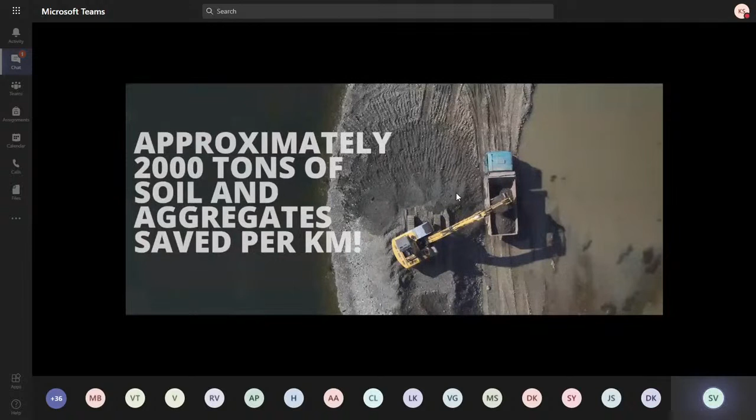Sir, it is not audible, sir. Sir?

Yes sir, so just a small video about where we're heading as a company. If you see the impact on environment over so many years, it is huge because of use of aggregate and other natural resources needed for construction of roads. If you look at the last 5 years, almost 40,000 kilometers of highways were built, and 60,000 kilometers are planned for the next 5 years, and this is only the highways. If you look at link roads, state highways, village connectivity roads, PMGSY, and various other organizations building roads, we're talking about huge numbers of kilometers. So it's a huge loss in terms of aggregates, and we're losing hills and a lot of other resources. Our goal is to try and reduce this as much as possible using environment-friendly technologies. We came across this technology in Germany 4 years back, and that's how we pursued it. We're intending to save anywhere between 80 to 90% of aggregates.

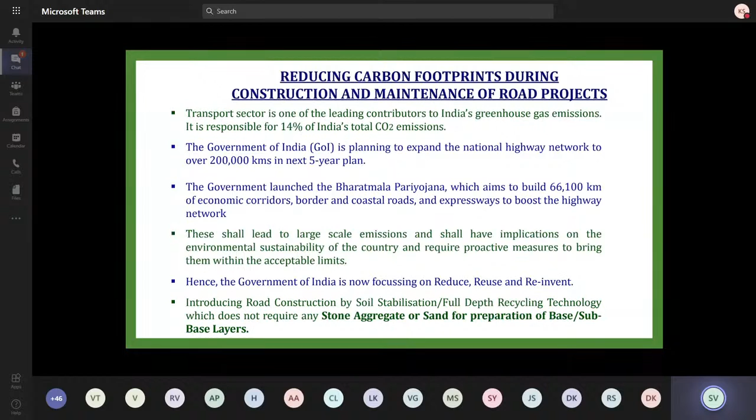The Ministry of Road Transport has previously come out with environment-friendly initiatives. In 2015 they came out with a circular stating that if projects are finding difficulty in implementation because of lack of aggregates, they can ask the government to go for new technologies. A few contractors have asked the government to change this policy. Especially states like Kerala have banned mining, so they have to get aggregates from outside, typically Karnataka or Tamil Nadu, leading to huge cost overruns of projects. Also Northeast has a huge problem with aggregate, as do Uttar Pradesh, Bihar, and Andaman. So all these states have problems or are in the process of banning mining. This is where we feel new technologies will play a very important role.

So I just want to give a brief on StabilRoad additive. Basically, stabilization has been there for many years, it's not new. It's been used in different parts of the world for maybe 30 years. In the last 7-8 years, we've also slowly tried it in India. They've done it with lime, used cement, and used fly ash to improve the subgrade or increase the CBR on a different scale.

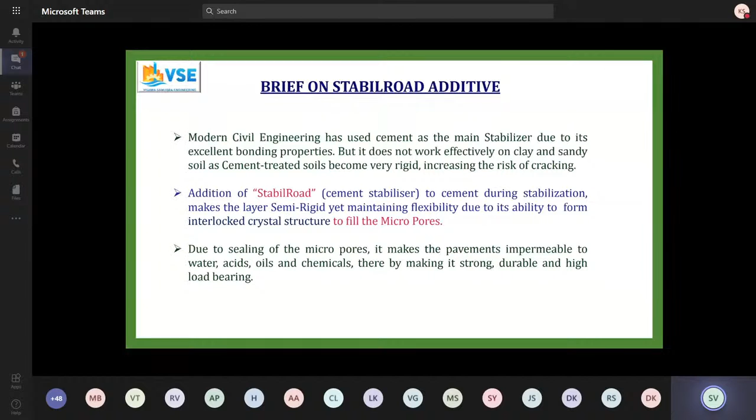So a StabilRoad is a cement additive which makes the layer semi-rigid yet maintains flexibility due to its ability to form an interlocked crystal structure that fills whatever pores are there in between. Due to the sealing of the micropores, it makes the pavement impermeable to water, acids, and chemicals, thereby making it very strong, durable, and high load bearing. It retains excellent dimensional stability even in damp and humid conditions, increases the elastic modulus of the pavement, eliminates the risk of shrinkage cracks, thereby enhancing flexural strength and significantly increasing the life of the pavement.

StabilRoad is manufactured by B&K Industries and is 100% natural. It uses 100% natural minerals with no synthetic chemicals. It's been tested in various organizations in India, especially the Indian Institute of Toxicology in Lucknow, which has tested it and given their report. StabilRoad has been used in different parts of the world over the last 20 years, and we brought it to India about 4 years ago. We have the exclusive rights for this product in India and in other countries around India.

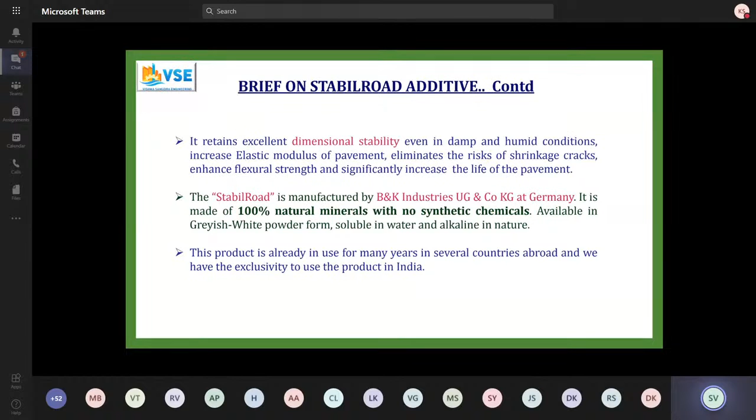One major advantage is very fast laying technology. Typically, the conventional method or a cement road takes anywhere between 2 to 4 weeks to complete 1 lane kilometer, especially when it comes to cement. Using our technology, if everything is planned and logistics are good, we can do almost 1 lane kilometer per day of stabilization. After 3 days, we can go for a layer of BT on top. So pretty much in 3 to 4 days, we are done with 1 lane kilometer. That's how fast we can do it.

And once we stabilize it, if there's an emergency, we can allow traffic within 6 to 7 hours, but ideally we would like anywhere between 12 to 15 hours. So there's no issue with allowing traffic, whether it's a rural road or a road with a lot of traffic in the city. We can allow traffic within 6 to 7 hours.

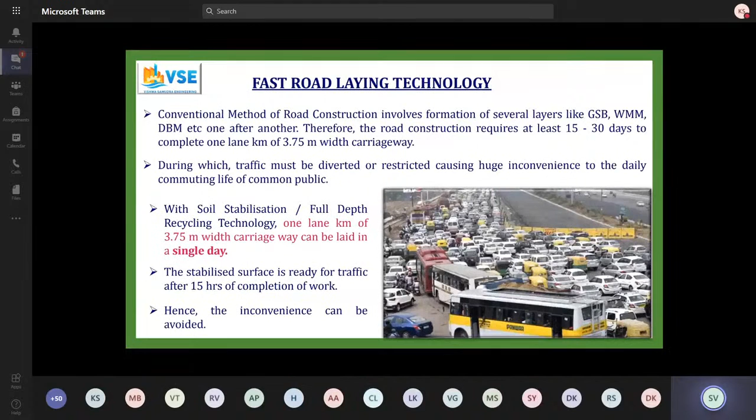StabilRoad has been accredited by the Indian Roads Congress, and like I said, we've been using it for more than 3 years.

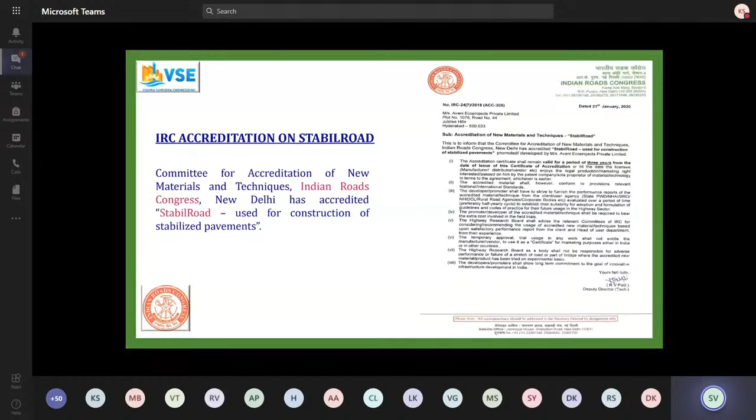Soil stabilization and full depth recycling. Basically, soil stabilization is a process where binders or additives are added to the existing soil to change its engineering properties. We've done different projects in India, including greenfield projects, where we use soil stabilization. Full depth recycling is for existing pavement, where we rehabilitate it by just mixing cement and additive. So we're not removing or wasting any portion of the road. Usually we scarify and remove 30%, or in some cases use 30% of the asphalt for recycling of the bitumen. So here we're not removing anything - we're using the same surface and stabilizing it.

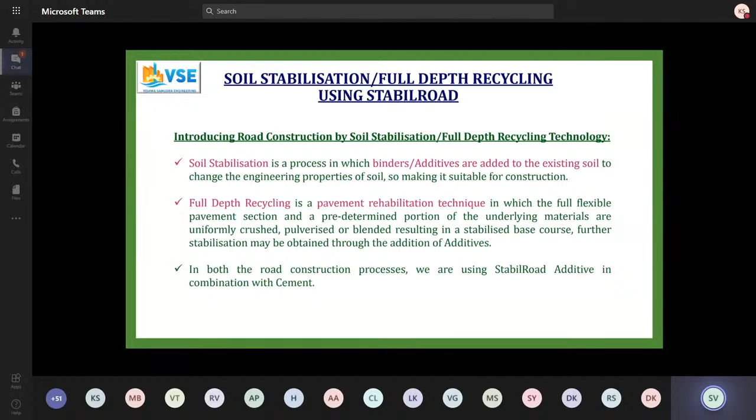So typically we are following IRC SP 89 Part 2 2018, which basically shows the guidelines for design of stabilized pavement. There are about 3 main factors in SP 89. One is the stabilized base layer should have a minimum compressive strength of 4.5 to 7 MPa.

The second is the durability of stabilized base should be tested by wetting and drying for 12 cycles. Maximum permissible weight loss after this procedure is 14%. Residual strength of the specimen after this test shall not be less than 80% of 28 days UCS.

A commercial chemical stabilizer has to be tested for toxicity and leaching by CSIR, IITR Lucknow, which we have already done. If the product passes these tests with reputed institutes like CRRI, IITs, NITs, Indian Institute of Toxicology, then it can be used.

In our case, from the beginning, CRRI has been with us. They've tested our roads from the day we started our technology. It's been 3 years. We just finished one road, actually 2 roads, after 3 years. CRRI tested it actually 2 weeks ago. So the entire process of 3 years has been done with regards to testing for strength and durability as well as FWD. I'll share those reports over the progress of this presentation.

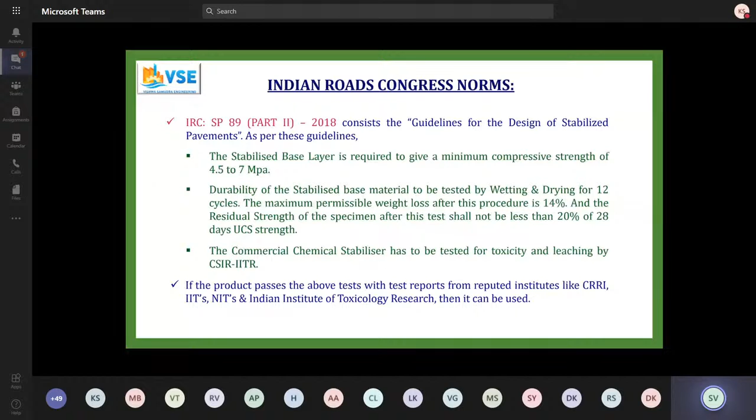So some of the benefits of stabilized pavement are: native soil can be converted to base course, reduction of excavation, disposal and transportation, reduction in crust thickness, faster construction, increased lifespan and low maintenance cost.

If you see the life cycle cost, it will be definitely much lower than the conventional roads, and the cost saving in the long run. That's what I meant for life cycle.

If you see also, sir, the load bearing - in general conventional roads, the load is on one point, whereas in the case of stabilized road, the load is being spread across the road. So that helps in giving us a better life cycle.

The highlights again - one more important thing is a reduction in thickness of pavement. Because our layer is so strong, the modulus is pretty high. Because of that, using IITPAVE, we can bring down the thickness of DBM and BC to a large extent.

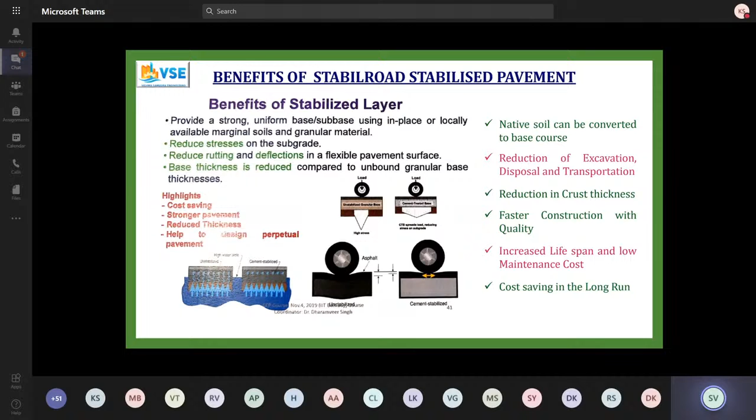This slide basically tells you a typical construction procedure using our design. As you see, the entire thing is mechanized, starting from spreading of cement to spreading of additive to recycling to compaction to grading. So the entire thing is totally mechanized, giving us excellent quality, and there is no chance of trying to save on the parameters of cement and all this.

After we finish rolling, typically we need about 3 days of curing. Traffic can be allowed within 12 hours. Curing goes on when the traffic is there. On the 4th day, we can go for a layer of prime coat and then go for a BC on top.

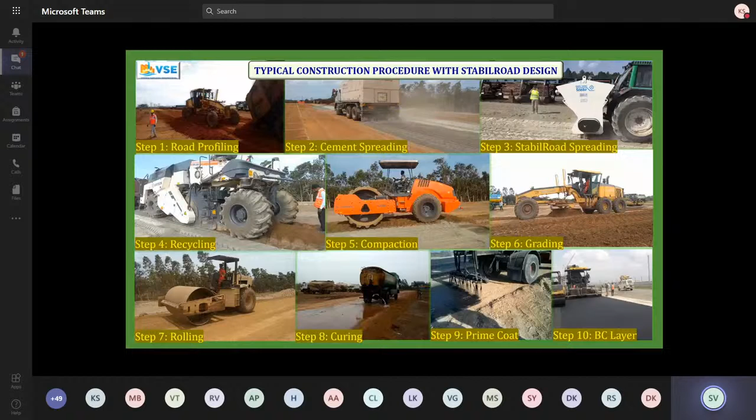I'm going to share a small animated video just to explain how the machine works, and then I'll show you another video about how the technology is, a brief video. Here we're spreading cement. There's an additive spreader which is not here, but then water is being pumped into the machine.

This is just a small animation. Now let's show the actual video.

We have done it in two roads. The first part shows you Greenfield Road, which we have done in a port where the volume was very, very high. We measured and we're talking about more than 200 MSA of traffic. The other part of the video shows you a road we have constructed in Hyderabad city, in the center of the city, on an existing BT road. So please go through the video.

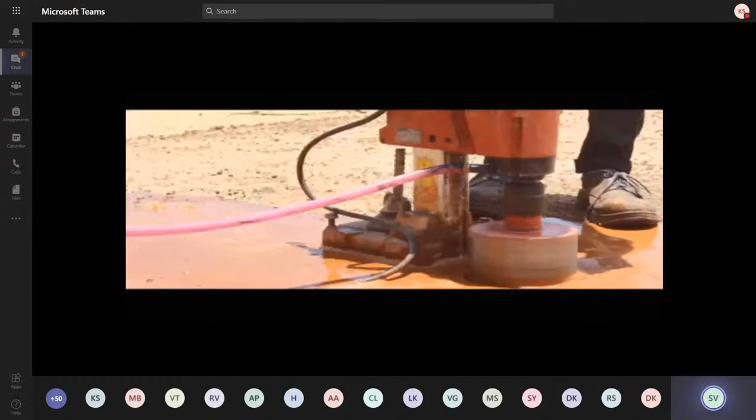We've taken a core after 28 days. Here we went up to a depth of 40 centimeters. We haven't used one single stone of aggregate.

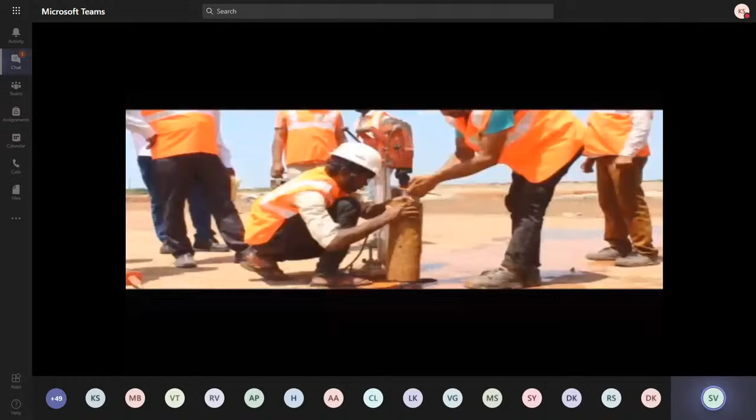The second part is the road in Hyderabad. If you see, this is existing BT. It's just spreading cement on top of the road. We haven't scarified anything.

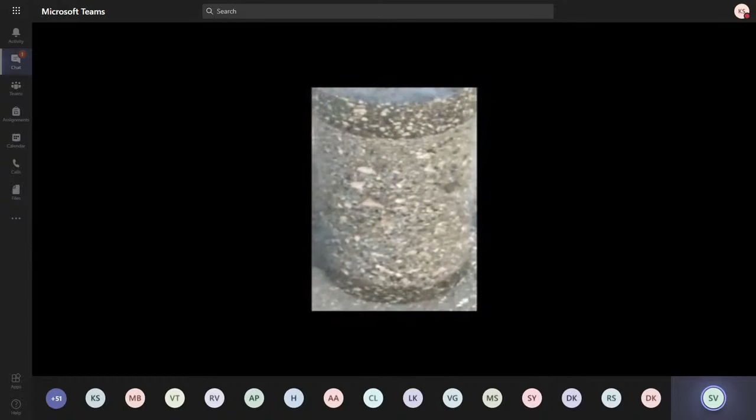Yes, sir. So the projects that we have executed so far total around 200 lane kilometers in different parts of the country: AP, Telangana, Kerala, Punjab, Bihar, Andaman. We are jointly working for construction of 400 kilometers of rural roads in Andhra Pradesh. This is funded by Asian Infrastructure Investment Bank, AIIB.

We have started work and completed close to 100 kilometers so far in different districts of Krishna, Kadapa, Anantapur and Kurnool. We are presently executing 80 kilometers of road in Andaman for NHIDCL, around 37 kilometers of road in Bihar for Ministry of Road Transport as a national highway.

15 kilometers for UPEIDA. They're constructing two expressways, Purvanchal and I forget the other name, but we're doing about 15 kilometers for the service road. Once it's been tested and proven, we intend to use this for the main expressway as well. We're also executing the rehabilitation of Hyderabad International Airport run by GMR, doing about 2.4 lakh square meters using our technology.

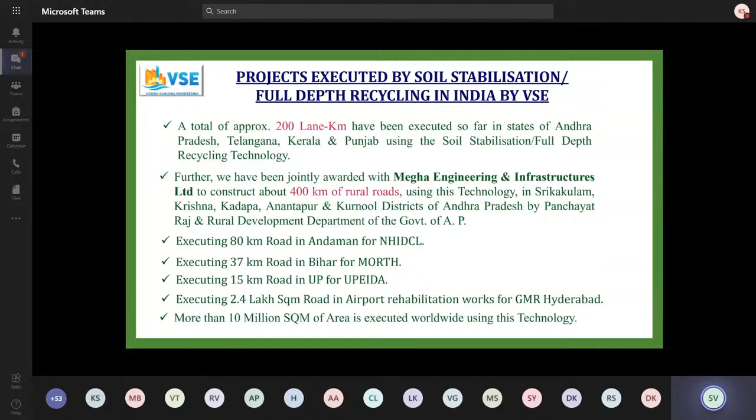Some highlights I quickly want to point out with regards to CRRI and IIT. Apart from CRRI, we also tied up with IIT Roorkee and IIT Chennai. IIT Chennai has already done a report, and we're in touch with Dr. Veeraragavan as well.

And IIT Roorkee with Professor Ransinchung, they've been doing work with us for the last 2 years. Coming back to CRRI, according to SP 89, the UCS after 28 days should be 4.5 to 7. In the lab at CRRI, they got a strength of around 5.88 on average, but actual on-site we have achieved 10.2. We've observed this in almost all the roads we've done so far, where the test result is much higher than what we're achieving in the lab.

The durability test - all cores have passed the durability test for the last 2 years. Now, for the third year, we've sent the cores to CRRI just yesterday, so they will be testing for durability for the third year as well. Most of you know about durability - it's 12 cycles, 48 hours each. I think 42 hours in an oven, then remove it, put 5 hours in water, then brush it and repeat. This has to be done 12 times, and after you finish, they check for the weight loss.

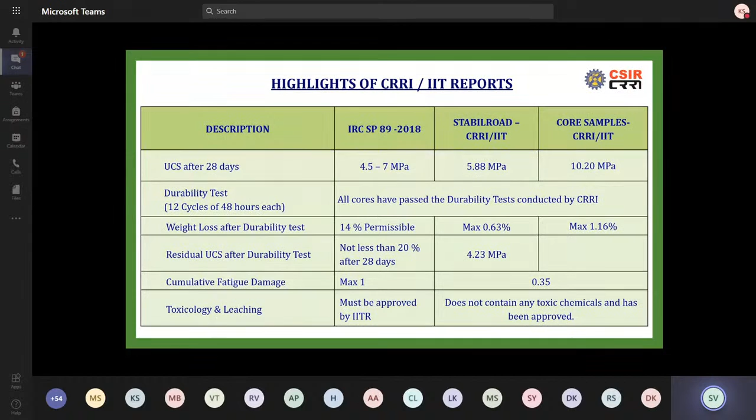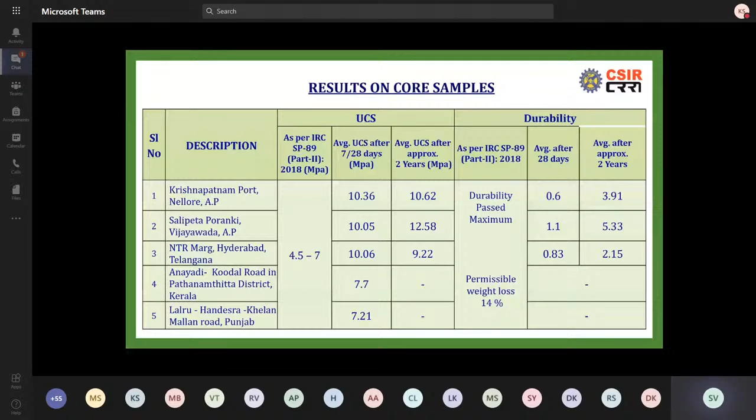These are the various roads CRRI has tested. For the first three, the average UCS after 28 days was 10.3. The next year, and the durability also is the same, around 3%, maybe 4%. These are other roads where we have achieved the UCS after 28 days - we are all well above the norm of 4.5 MPa.

This is the leaching and toxicity test I just mentioned, from the Indian Institute of Toxicology. They tested it for toxicity in various areas, and 0% immobilization was observed after 48 hours. So Stabilroad cement stabilizer is considered safe. Apart from that, IIT Chennai has also tested for leaching and toxicity, and the report is also there.

So I'll quickly run through all our projects with pictures. This is the work we're executing at the airport in Hyderabad, GMR. There are actually two runways, each 4 kilometers long. The width of one runway is 45 meters, the other is 60 meters, and the taxiways as well. Stabilization we have used close to 2.5 lakh square meters.

We're still in the process of doing it - we've finished around 80,000. The balance is on the main runway, which will be starting by December 1st. The cement we used is around 25 kgs per square meter, and Stabilroad was around 1.2 kgs. This is because there was already a lot of aggregate at the bottom, so the surface was relatively strong, so we used less amount of Stabilroad.

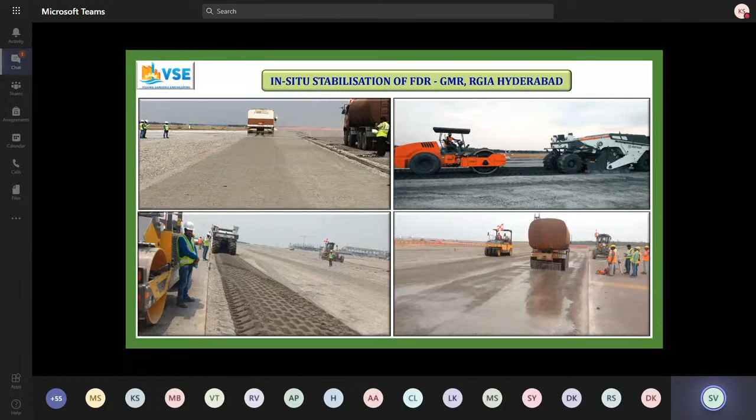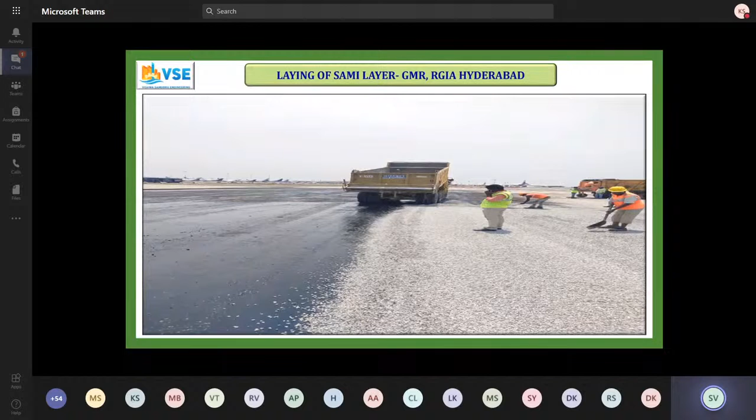These are the pictures of in-situ stabilization - spreading cement and then recycling. Then we went for a SAMI layer, using the chip spreader, which is totally automated. It comes through that chip spreader layer. First we put PMB 40, then laid the chips on top of it, and then rolled it. The consultant for GMR asked us to do two layers of SAMI, so we did two layers, one on top of each other, before going for SDAC and DAC.

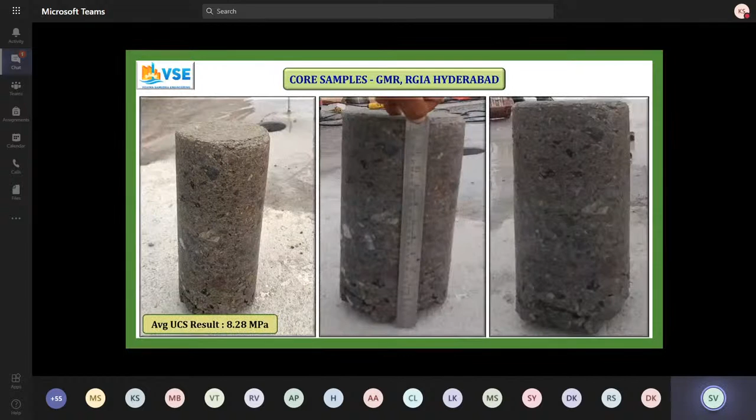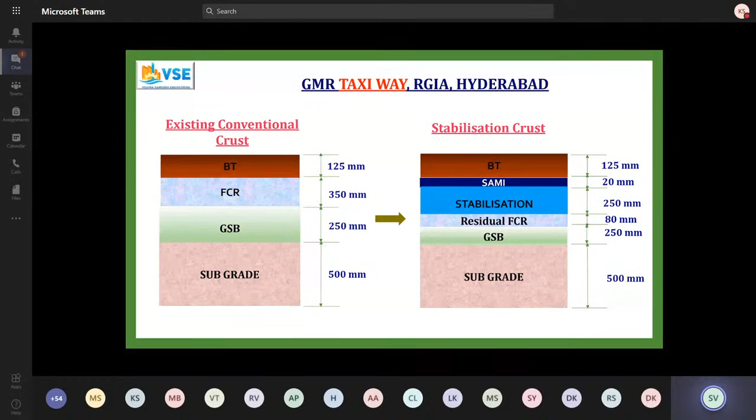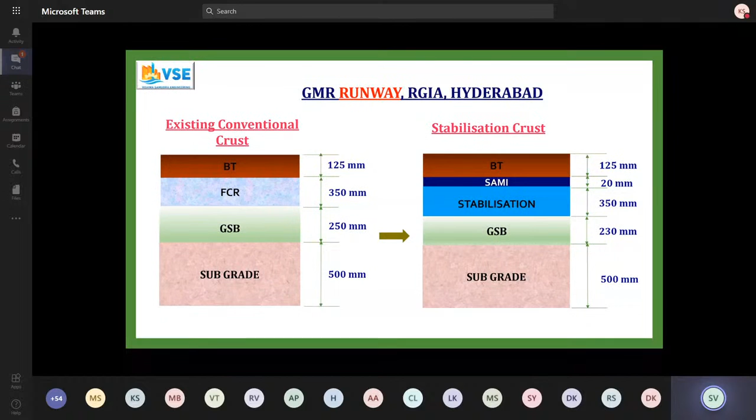So here we saved about 75% in aggregates.

The works were executed under MORTH, NHAI and NHIDCL. We did a road in Bihar, in Sitamarhi, the Jayanagar stretch. Here they had a lot of issues with aggregates, they were not able to get aggregates to the site. So that's when the Ministry of Road Transport asked us to find a solution, and we went and did that.

Its total stretch is 37 kilometers. The first phase is 20, and we finished around 13 kilometers so far. We used around 40 kgs of cement and 1.4 kgs of Stabilroad here, and went up to a depth of 300 mm or 30 centimeters.

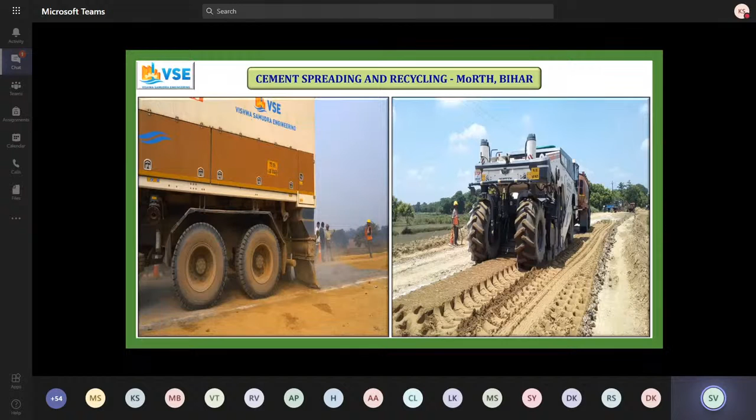If you see the soils, there's an existing road, and of course the soils are very sandy and very different, typical soils. So we have stabilized here up to a depth of 300 mm. This is how it looks after stabilization.

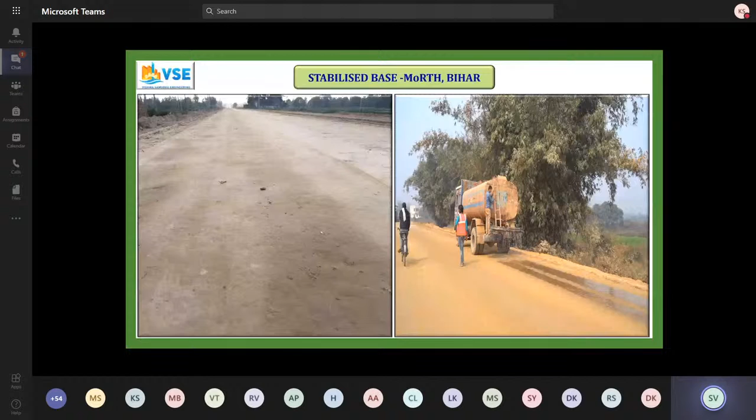Here we used a geosynthetic as a SAMI layer. Since we're using cement, there are bound to be certain superficial cracks on top, so this is to arrest the cracks coming into the BT layer. We have gone for the SAMI synthetic paving fabric, and on top of that we spread the BT.

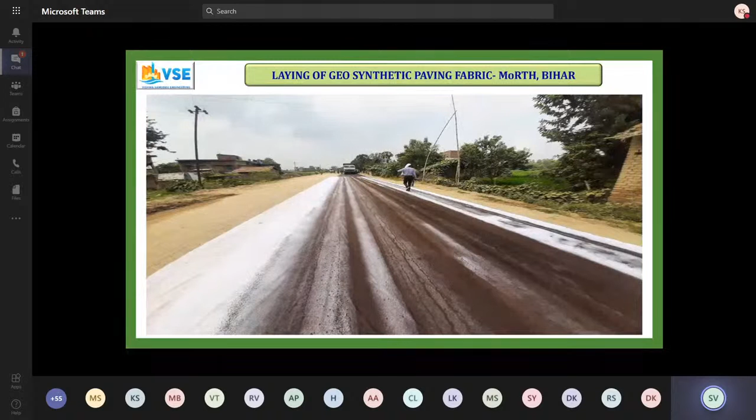Here we haven't used DBM because the traffic is less than 20 MSA. If you see here, GSB, we've gone for 300 mm of stabilization followed by SAMI. Oh, I'm sorry, I think we did use DBM - it's a national highway, I think it was 40 MSA. So we used a DBM of 50 and then BC of 40.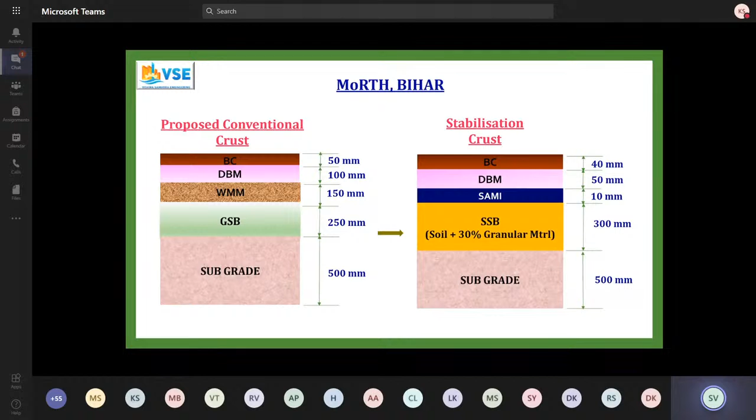Here again we used, if you see, a 78% reduction, but the aggregate usage you see is mainly for BC and DBM. The actual stabilization part, there's hardly any aggregates that we used. These are the cores in Bihar.

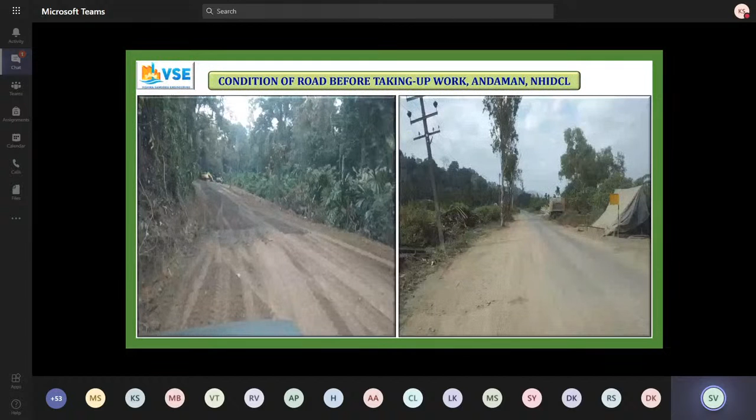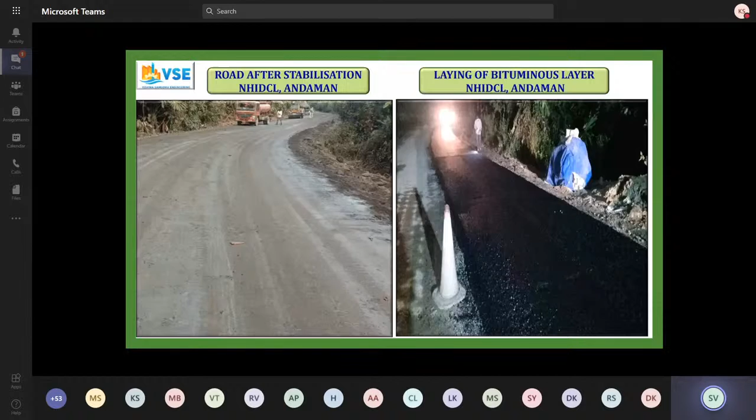Using this technology, we have saved almost 350 crores for the government because of shipping of aggregates. So this is the road before taking up the work, and we're spreading cement and the additive, and this is after stabilization. They went for a chip seal and then a layer of BC on top. This is the chip seal being rolled on top of it, and this is the finished wearing course.

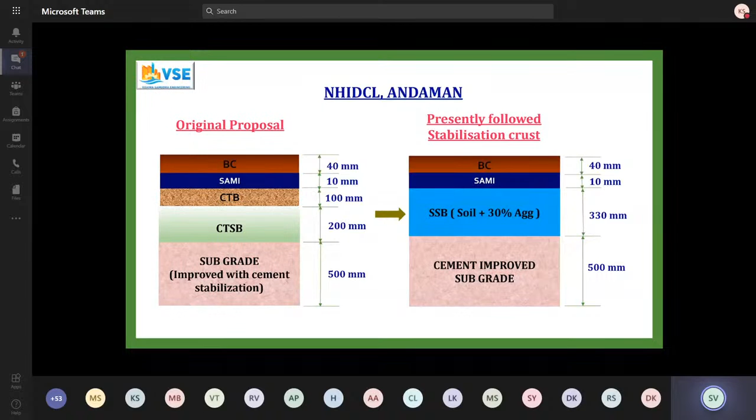Again, we've gone up to a depth of 330 mm or 33 centimeters, followed by SAMI and BC. Here, if you see, we've saved almost 90% in aggregates. The traffic was 20 MSA, and the UCS we achieved was around 8.9 MPa after 28 days.

The existing road had some aggregates, so that's why you see aggregates here. Otherwise, per se, we haven't added any aggregate - whatever existing soil was there, we just churned it.

This is a road for PWD. You just saw the video - this is in the state of Telangana. This is the road you just saw, after 3 years. It's the same, this road was actually getting damaged before, that's why they asked us to do it - there's a lake here, and so it was getting damaged. But now it's been 3 years and not a single rupee has been spent on maintenance.

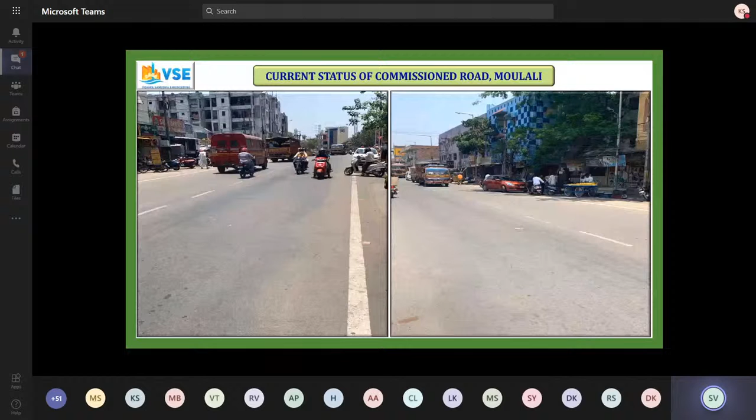Another road in Hyderabad - these are the cores in Hyderabad. On the left you see the core after 28 days. On the right is the latest, about 2 weeks ago, when CRRI came and took these cores, and this is after 3 years. If you see, the UCS value has gone up a bit.

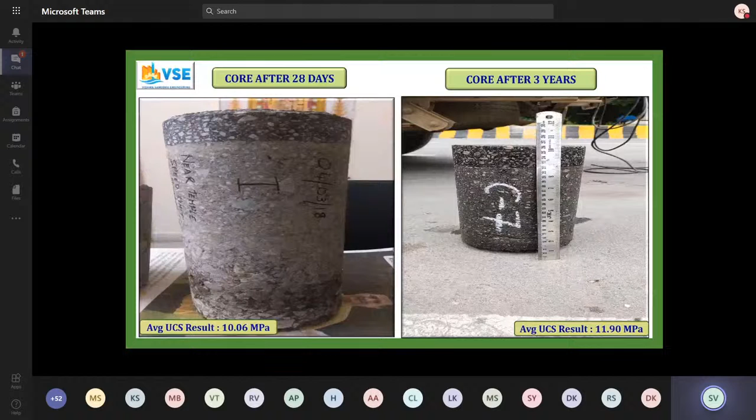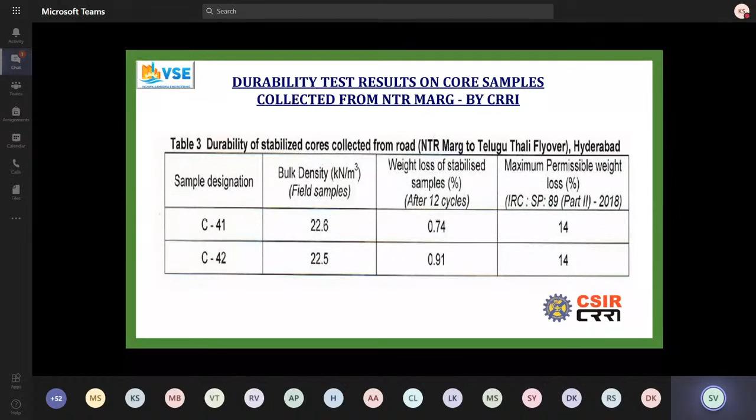This is the durability. As you can see, the absorption is less than 1%. This is the compressive strength over the last 3 years.

We've also done FWD testing for 3 roads. This is one of the roads, monitored along with CRRI.

Basically FWD is, I'm sure most of you know, an impulse loading device, which applies a transient load to the pavement, and the deflected shape of the pavement is measured. We're measuring the deflection using, typically, 60 to 80 kilonewton weight dropped on the pavement surface, which gives a reading.

I'm happy to say that over the last 3 years, the reading has been exactly the same. This basically shows that the surface below the pavement has not been affected at all, and the strength remains the same, so it should last for a number of years at the stabilized portion.

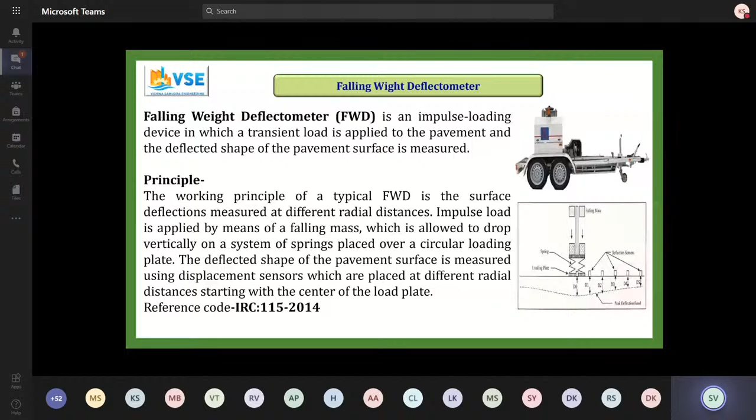Another slide on the same FWD, if you see quickly: the conventional layer, the bitumen layer elastic modulus is 2411. For us, our bituminous layer was 2300. But if you look at the base layer, conventionally it was 485 elastic modulus. In our case, the average was around 7,000.

Which gives you an idea of how strong the base is. The average deflection value is almost half of a conventional road, 0.094. At the bottom, the tensile strain at the bottom of the bituminous layer and compressive strain at the top of subgrade are less than the limiting strain requirement of 80 and 200 microns as per IRC 37 for long life pavements.

The tensile strain for the stabilized pavement was around 25 or 26, tensile strain was around 30, and the vertical compressive strain at the top of subgrade was around 90, which is very well within the norms, or even less. This gives you an idea of how strong the layer is, and this is after 3 years.

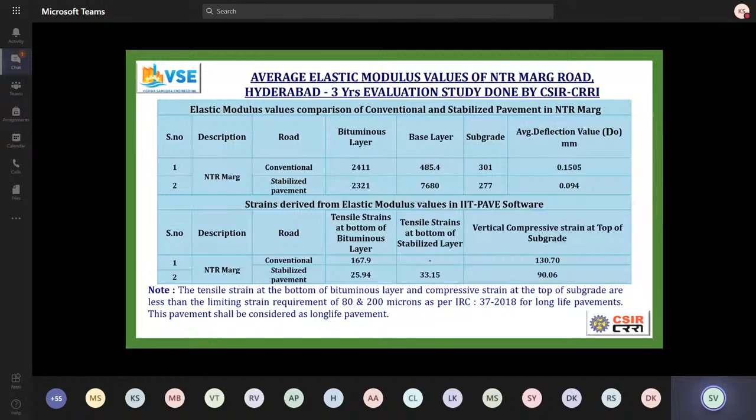Again, on the Hyderabad roads we saved around 92%. This is a road we did in Kerala. If you remember, there were some very bad floods about 2 years ago. So they asked us to come and do one stretch which was badly damaged. Here we used about 30 kgs of cement and 1.2 kgs of additive.

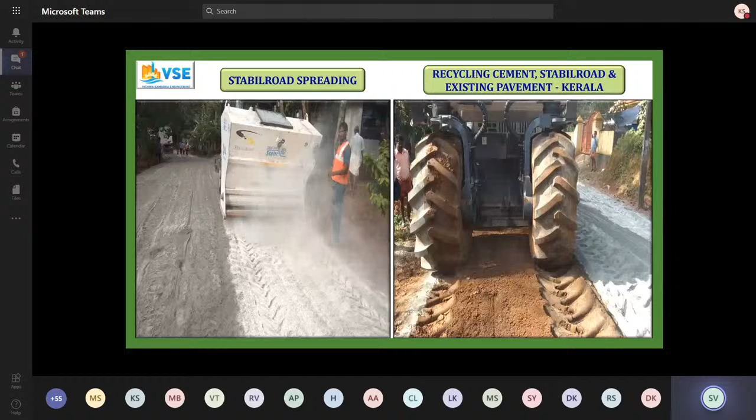This is how it looked - almost the entire road was full of potholes. Like I said, we don't scarify it, we don't do it any other way. We spread cement on top of it, spread the additive, recycle it, then compact and give it 3 days of curing.

Now this is how the surface looks after 3 days - very strong, as it is, if you look at it. Then we spray bitumen on top and go for the laying coat. In this particular road, traffic wasn't great, so we didn't go for any DBM, we went straight for the BT. This is almost 2.5 years ago that we did in Kerala, and it's still holding very good.

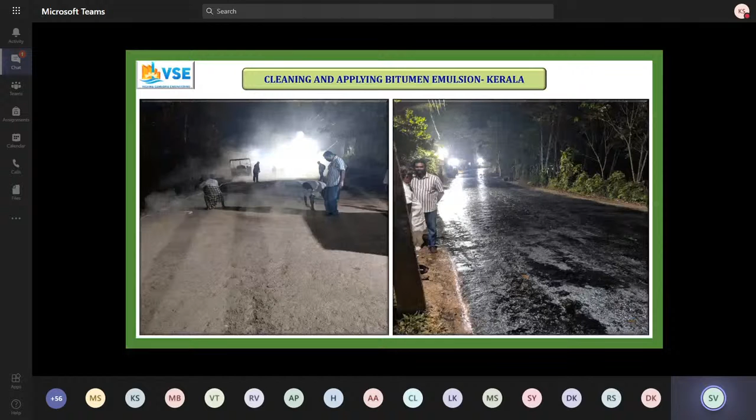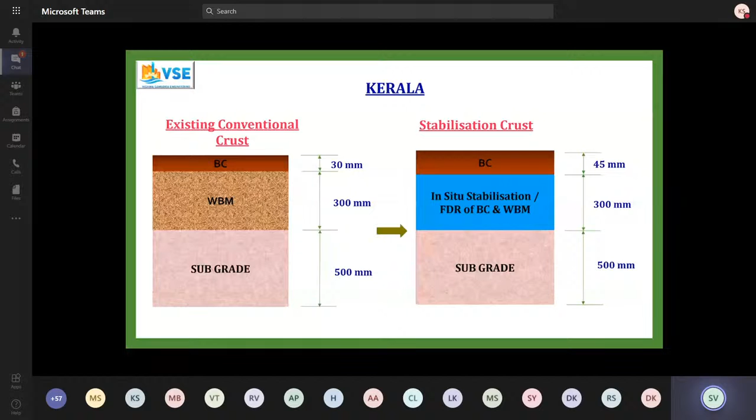This is the road we did in Punjab, your home state, Lalru to Handesra, close to Chandigarh. So this is how the road was on the left hand side, and this is after it was finished - the same stretch, exact same location. I took a picture.

If you see this slide, almost 3-4 kilometers was like this - a lot of potholes, impossible to go. And this is how it was after we finished. Since we go up to a depth of 30 centimeters, we didn't add any aggregates or soil on top of the existing road, which is on the left. Since the machine goes up to 30 centimeters, we just went ahead and recycled it as it is, without adding any materials.

Now I think this particular road has become very busy. If somebody can have a look at it, it'll be nice.

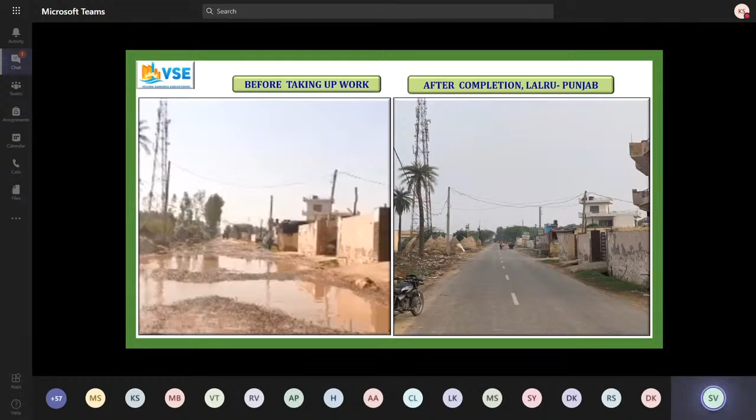This is the finished portion. In fact, 3 kilometers of this road is full of quarries, so the road was very badly damaged. You can even go have a look even after 2 years - I think it's about 1.5 years. You can still go, there's absolutely no damage to the road. You can see the number of vehicles going, and the quarries and all that.

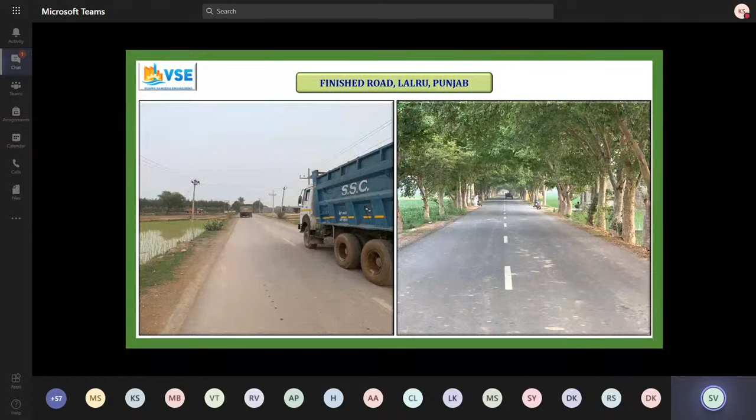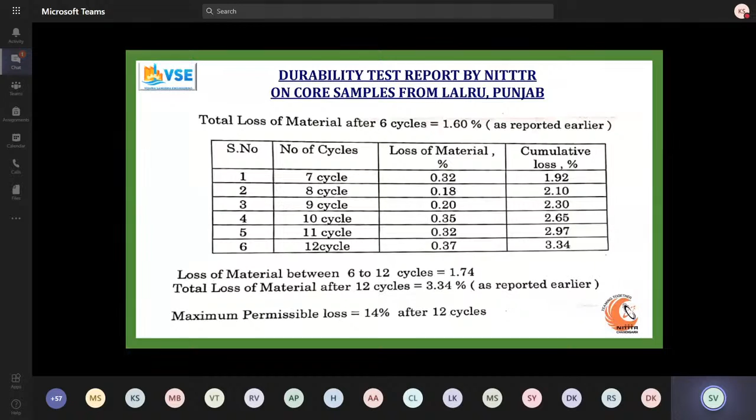So this was a 20 MSA road, and we've got a UCS of 7.21.

Now I come to rural roads, Panchayat Raj, like I was mentioning, state of AP. Here some roads were BC soils, some were good clay, good soils, so it's not the standard for every single road. For this particular road, which was BC soil, we had to use a little more amount of cement and additive.

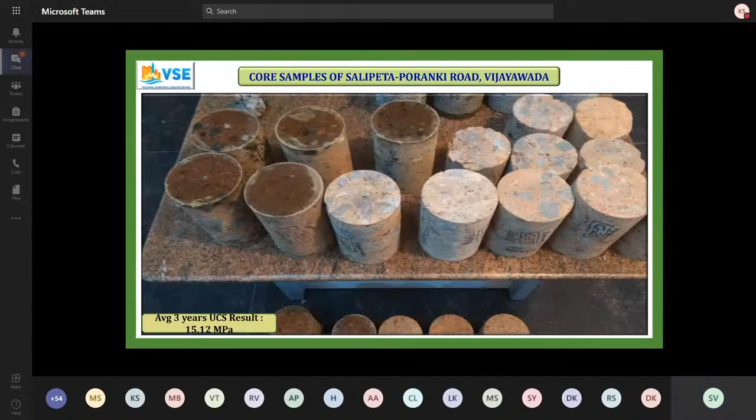Again, very good strength. Actually, in rural roads, we follow IRC 72, which requires a minimum strength of 3 MPa. But in our case, we have achieved much higher. So over a period of time, we have to reduce the dosage of cement and additive to get the optimal result. It doesn't make sense to use so much material. So we're working on it.

This is the strength. Again, CRRI has tested this road 2 weeks ago, and this is the strength they have achieved. It's actually gone up.

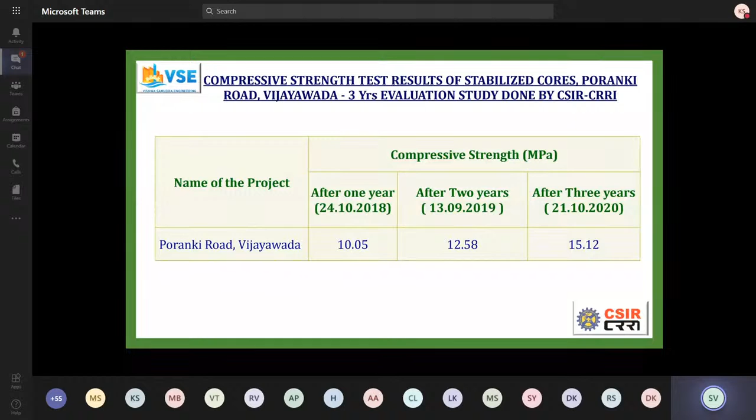Again, FWD was done on these roads. Very interesting - there was a national highway done by Dilip Buildcon, adjacent to our road. So we did a comparative study, just to see stable road versus a national highway, which has DBM of almost 80-90 mm and 45 BC. And since this is a national highway, CRRI just wanted to do it, and this is a comparative study.

If you see the base layer, we got close to an average modulus of around 6,800 versus a base layer of the national highway which was around 470. The average deflection was very similar to the national highway, much better than a conventional road close by. And again, within the norms, if you see.

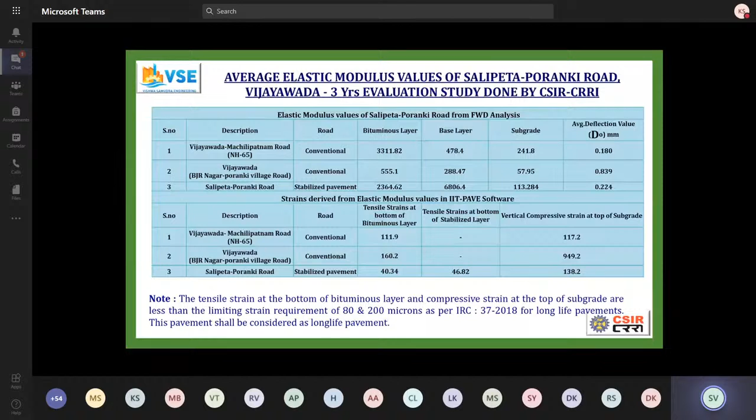These are typical roads funded by Asian Infrastructure Investment Bank. They are doing almost 5,000 kilometers of roads in AP. Out of that, we are doing around 400 kilometers of stabilization using this technology. They are typically around 3.75 meters wide roads, connecting rural roads where there are hardly any roads, or the roads are very badly damaged. So this is really a game changer for connectivity of roads for people living in remote areas.

It's been 1 year since we started some of these roads, and even after these heavy monsoons this year, there is not a single road which has been damaged.

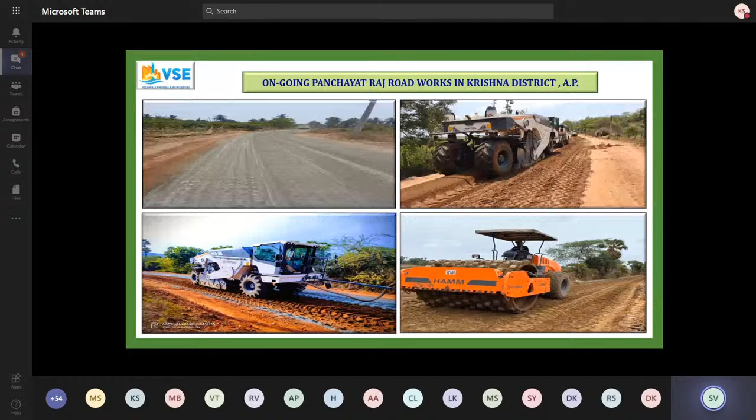So the next segment is private port industries. I was talking about this - this is where we first did it about 3 years ago. This is Krishnapatnam Port. This was the first project in India, and the quantum of traffic was very huge - touching about 220 MSA, with almost 3,000 to 4,000 trucks every single day on these roads, carrying coal, fertilizer, you name it. So here we went up to a depth of 40 centimeters of stabilization.

We used 60 kgs and 1.8 kgs of additive. Just happy to say that in 3 years, not a single rupee has been spent on maintenance of these roads. You can check with the port authorities as well. It's holding up very well. These are the roads after 3 years.

This is the core. On the left is after 28 days, on the right is after 3 years. If you see, it's exactly the same. This is a greenfield road - not one single aggregate we have used on these roads. No DBM, we went straight for BC because we wanted to test how it performs, and it's absolutely fine. There's only a layer of BC on top.

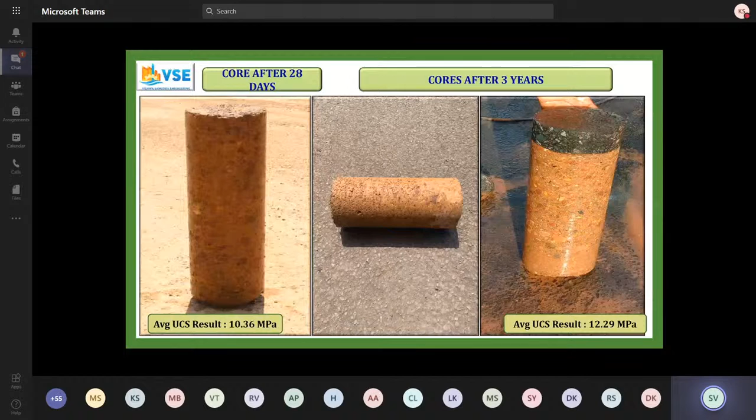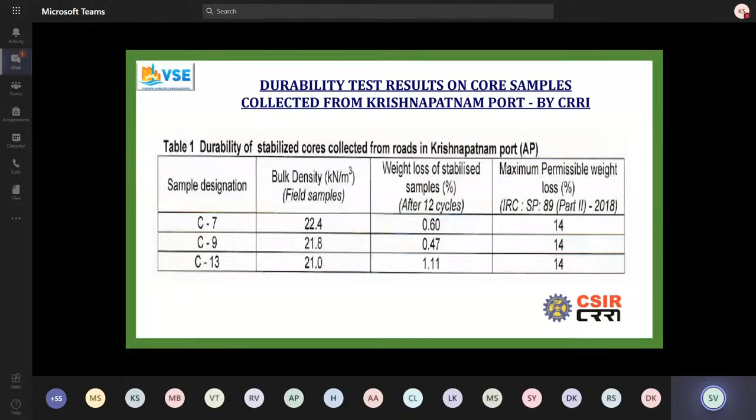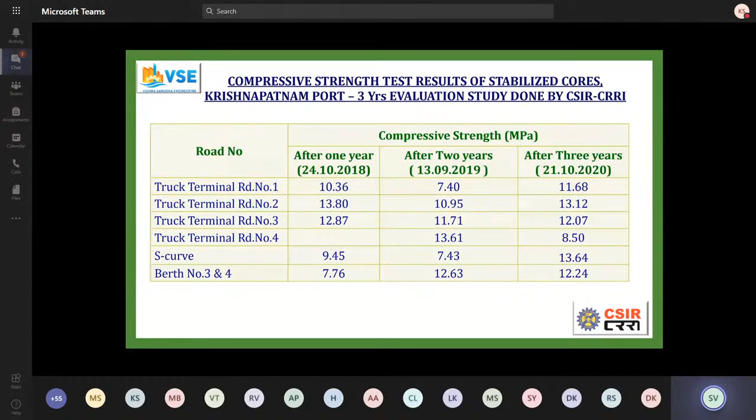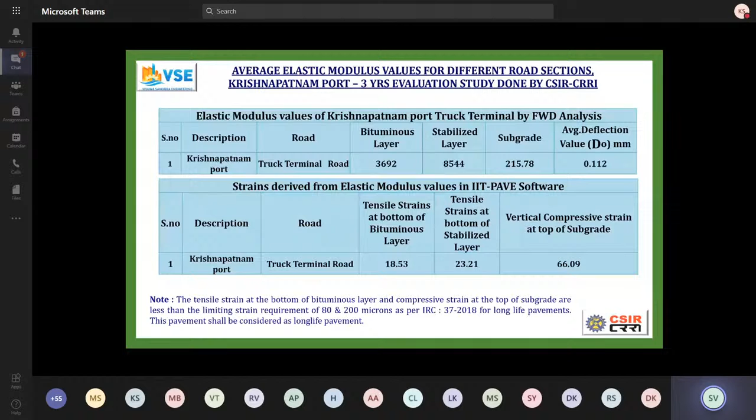Again, FWD was done on this. If you see the values of deflection, the deflection is very minimal. These are the roads after 3 years at various locations. We've also specifically tested one point on the S-curve - we wanted to check if there'd be any rutting or undulations because loads are transferred when vehicles are turning. We found that there's absolutely no undulations or rutting.

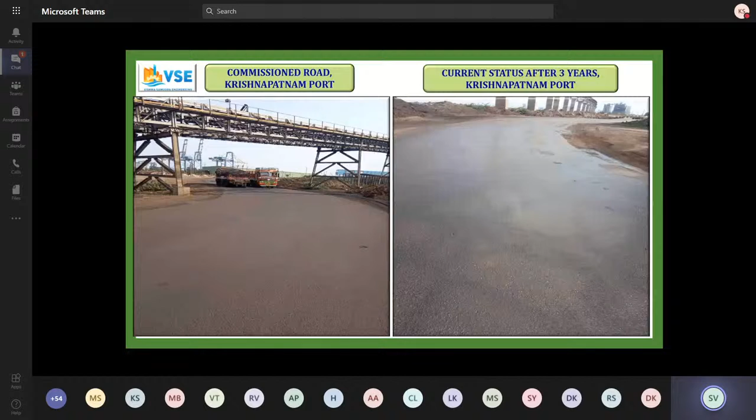These are the kind of vehicles - this road is right next to the berth, so very heavy loads, and it's holding up very well.